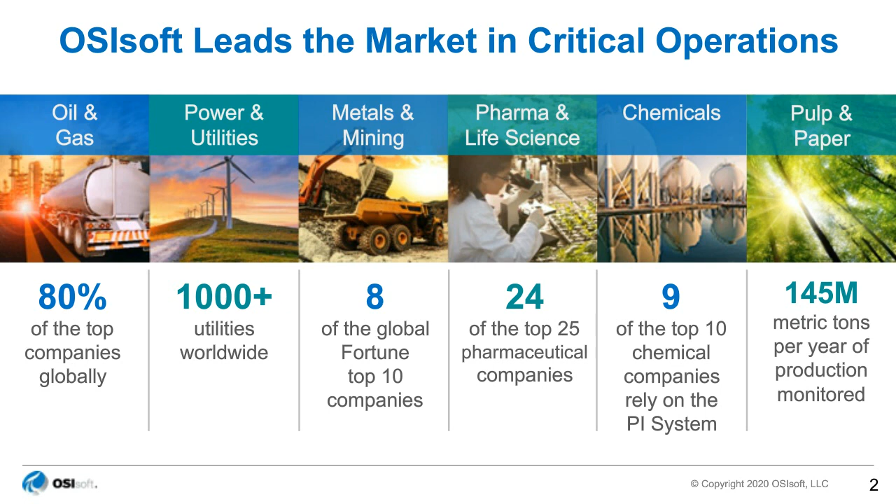Most of these industries have a lot of the common type of things that they do. So condition monitoring and looking at equipment health from a real-time basis as opposed to a post basis or a reactive basis is one of the things that all these customers are doing. Equipment's equipment, and whether you're monitoring from a sensor to a piece of equipment to an entire system, the PI System has been successful across multiple industries.

So how do you do this? How do you systematically turn all this data into consumable and actionable information? Digital transformation needs to drive value and results, and we have many customers that are doing so. And that's why we created the PI System, to be able to have that live situational awareness. So the data has real-time information, it has past information, and it also has future data. This lets you be situationally aware.

Also, our tools are designed for you to be able to mine this information. In the past, it was basically just trends. You had to mine and look at your data and your trends. Well, now the tools are built to consume not only the data, but event frames, contextual data, and calculation and results of analytics and such as well. Then, of course, the system is also built to fill any third-party application needs to give it that critical OT data that it may need to run, similar to our product that Mike will be talking about later.

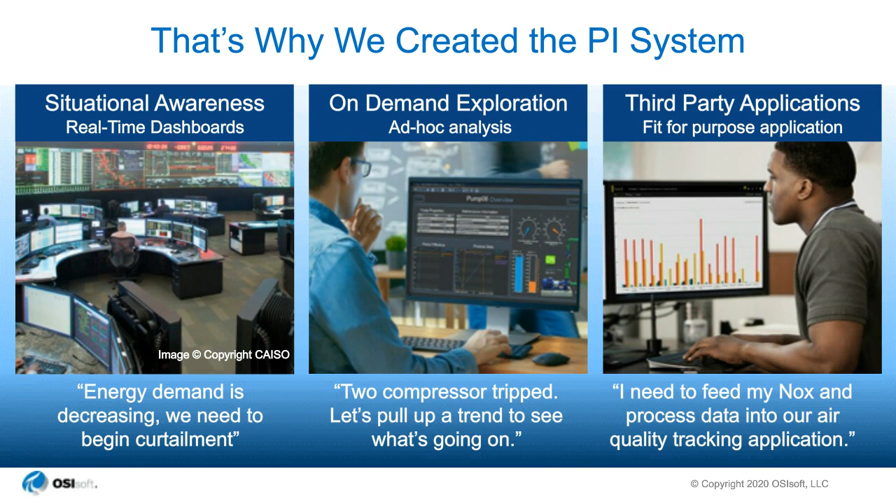To make that information available to more people, really to broaden the breadth of that information. That information used to be locked down inside the control room. And in this instance, we're opening it up. You're going to make a passive copy of all that real-time critical data now everyone can use. So you're really widening the use across your organizations, being able to get that data into your engineers, into your data scientists, so they can use that in their platforms and in their tools as well, to your maintenance engineers, to the people in the field for remote operations.

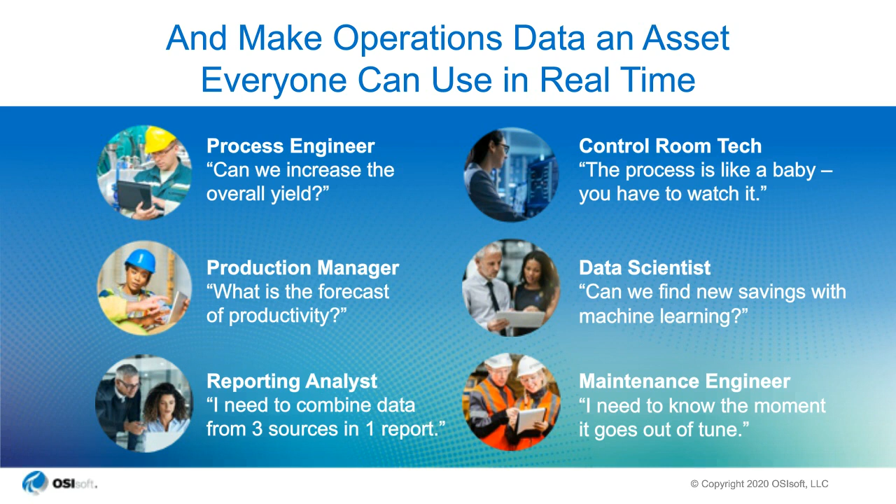During this pandemic, it's been critical to get data and information to people who are remote, people working from home or people going to the site, not with their normal crew, but just by themselves and such. To be able to have access to all of that information has been critical during these times, and our tool set allows that to happen.

So how does the PI System work? Well, we have really pervasive data collection, and within this data collection, there's over 450 standard out-of-the-box ways to collect data. These are high-speed fidelity interfaces that can bring data in at the speed of whatever you're connecting it to.

But we also have interfaces that collect data from websites and do scraping HTML5, or hit a file to pull data from files. So being able to bring all your data together is more than just the real-time data. You want to bring data together that's also your manual data, test data, these other types of things, to get a fulfilled, correlated type of database to give you richer information.

Now that information goes in to be able to be stored and enhanced, and everything in this circle here is one product. It's multiple features, but it all becomes one system, and that's the PI. And so in the data archive you'll store that high fidelity real-time data, the future data and those types of things, and be able to access history. Asset Framework is a way to organize that information and put it in a way that's better consumed by users and by systems, and we talked about that kind of extensively this morning.

And within that Asset Framework, we can perform asset analytics or real-time streaming calculations, also by marking the database on key events. That way you can mine these events in the time frames of when they occur, and be able to systematically pull that information and view it and report on it. Also being able to create notifications that go not only to people, but also to systems like work management and such. And then of course we have to be able to deliver that information, to visualize it, to consume it in PI Vision or in PI DataLink, which is an add-in to Excel.

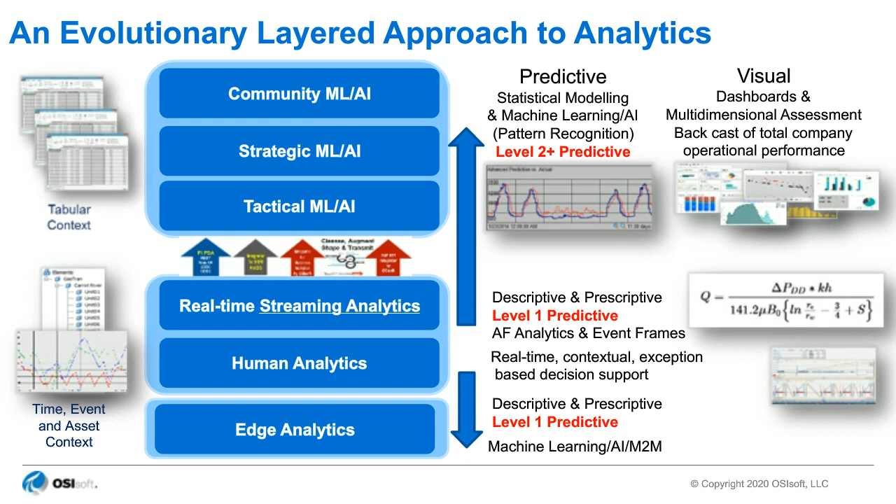Now, the idea of having the IT data lake and the OT structure, we bring those together. We allow you to use IT tools to be able to look at that OT data. When you're talking about the big data lake, the big value add there is when you can take your OT data and correlate it with other supporting data that you may have in other systems, like maybe your transactional systems in your trading platforms and other types of things.

And you really want to see how the fleet performed versus maybe forward positions in power and gas sales and such. Maybe we sold a little bit too much power forward, and we could have kept some back based on the market, right? So being able to do the circular analysis, that's a good use of a big data system, right? Of being able to get multiple points of data together.

But for our purpose of monitoring equipment and such, that sometimes might not be the right tool to apply to analytics, when really what I want to know is, hey, I had a high vibration on that pump. I want a message to come to my phone. I want to be able to look at that data immediately when that happens. Now, that I see happening really in this real-time streaming layer, and also in these top two layers of tactical and strategic, usually done via an advanced pattern recognition program, which we're going to talk about later, or with ties into machine learning libraries and such.

So I hope that kind of clears up analytics and different places that you can place them for high value. I want to talk a little bit about a PF curve. Now, those that aren't in maintenance may not have seen this, but a PF curve basically illustrates that for every piece of equipment or system, there's a P point on the curve, the potential failure point, where some type of degradation has happened. So a piece of equipment or a system is degrading, and this is a point of detection. Then, of course, there's the F point on the curve, which means now that piece of equipment or system has gone to a failure mode.

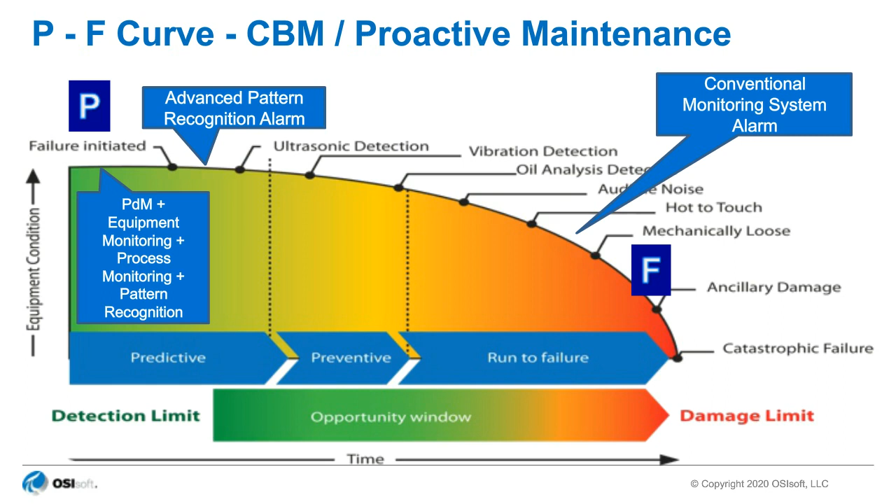You're just waiting till something breaks, and now you're out of the market, you're out of the money, and you're having to plan to repair the device. You may have to go buy replacement power in the power generation industry to put power back on the grid, and then you still have to go fix the equipment.

Now, on the preventive side, you're not really reducing preventive. In fact, you may have to increase preventive in some areas, but what you're really doing is optimizing preventive around a condition-based strategy. So condition-based strategy doesn't mean I'm just moving things from a time-based system, right, to exactly hours of run and operations. It's when I do run a certain amount of hours and a certain amount of start and stop counts, I'm also looking at, well, what's the condition? Is it still good? If it's still good, maybe I get 500 more hours out of it. So what you're doing is you're optimizing your preventive maintenance, and by doing both of those things, the end result is to drive down maintenance that you're doing based on reactive work.

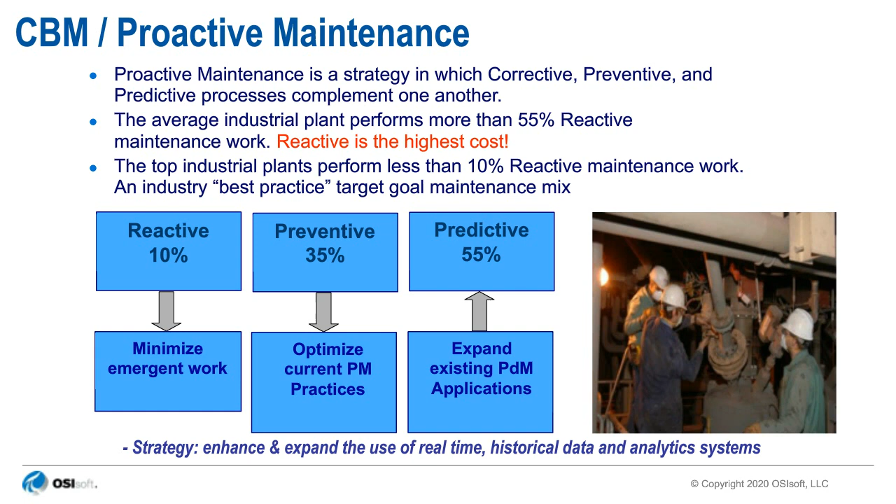An idea around this is in electric motors, we started early detecting of just the winding temperatures going up on the motors themselves. So you change your maintenance practice to clean them quicker and sooner, and that way you never really have any winding temperature damage or any related bearing damage as well. So you want to optimize your work order type of system. You can actually code work order systems to have these in there and track the improvement of plants over time as they adopt the technology and deploy a digital strategy.

You're talking about the PI system. Simple kind of decomposition is that you're really going to gather the information in the PI system. You're going to collect it with those interfaces and ways to bring in data and information, all your real-time data, and correlate all that information together. Then you're going to transform some of that information into these calculations where you're getting efficiencies and design versus actuals, and rate of change, and these types of things. And you do that in the real-time data stream.

And then, of course, we can do more CBM type level things. We're talking about volumes and time and service and such. And then, of course, being able to consume these either by registering and running some KPIs within the calculations, doing reporting against these things, or feeding it into other applications. All that functionality can be done right there within the PI system.

And then, of course, to tie that PI system into a work management system like Maximo, SAP, Meridium, or also tying in for another level, for that level 2 analytic, an application which is a bolt-on, like advanced pattern recognition or machine learning type of application that allows you to get even more insight to these assets. So that's basically what that would look like under a construct under PI of what CBM would look like.

So let's talk about asset framework. Asset framework is a way to be able to structure your information and then consolidate more data into it. So basically, it's an object model and an abstraction layer. And the abstraction layer is both for users, ease of use, and then also an ease of use to getting data into other applications as well.

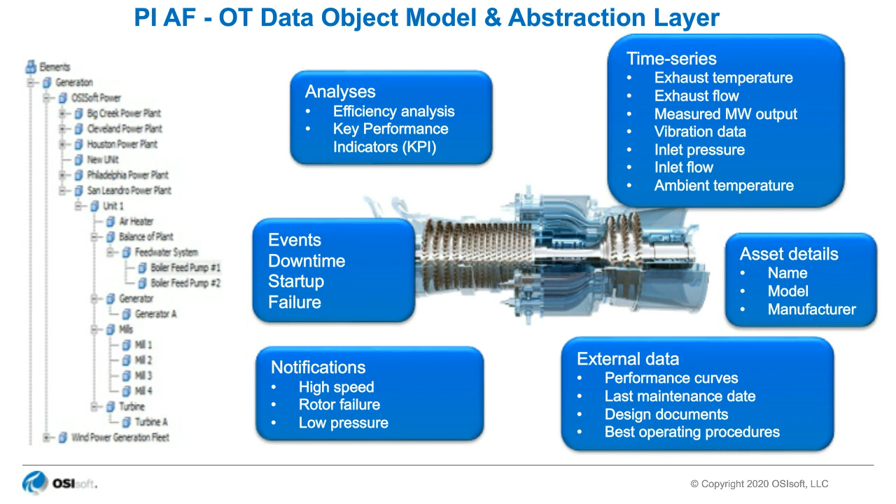We can calculate these efficiencies and performance indicators and doing downtime, startup failures. We can do all these types of events that'll show the startup of a gas turbine and the shutdown of a gas turbine, or the variations within what's going on in other types of generation assets. We can turn those into notifications as well, and reference performance curves and limits and things. And anything you get in the abstraction layer and in that model, then you can do mathematics on those. Now, let's talk about what that means. It means that we're connecting to all of our raw real-time data.

We're going to put that into a structure that makes sense and is consumable to the users and puts the data and information in areas that make sense, like all the data around a pump, all the data around a generator, and we can consolidate that information so it's easier to use and find and easier to do that mathematics. Also being able to reference those other things that you do.

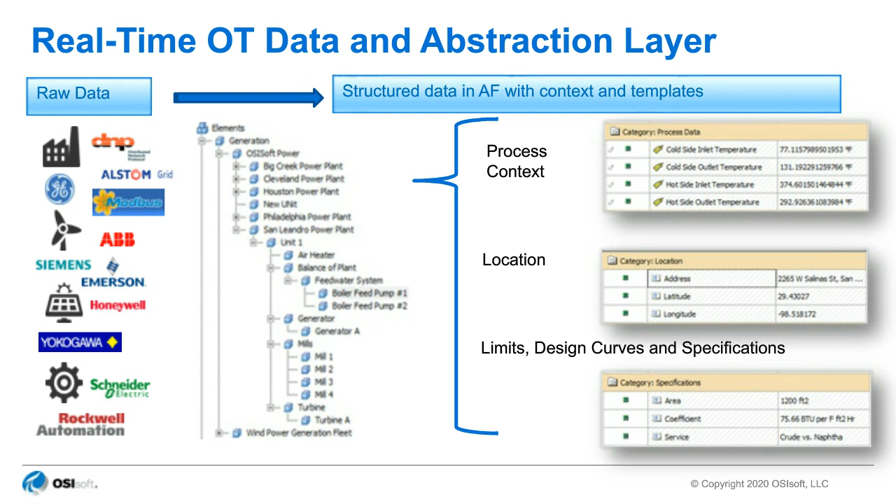Now, once you have all your raw data in a structured data, now what we can do is use those event frames and analytics and change and create new information, transform that data into more consumable stuff. Like, hey, I'm taking like an amperage or a flow and I'm turning that into, I know that pump is on or off. So I have a start and stop counts. How many times does it run? How long has it been running? I can have this systematically be recording into the database. And then all I need to do then from a reporting perspective is mine that information. I can move the data screens around per those timeframes and such as well to do ad hoc analysis.

I can do things like rate of change calculations. So if I have a generator that only heats up at a certain amount from start to on, but I start seeing it heating up at a faster rate, I can have that send a notification to me. Doesn't mean it's hot yet. It just means it's getting hotter faster than it normally does. I can compare actual versus designs.

There's all these things that we can do in that layer right there in the real-time data stream itself, and be able to do these calculations, and of course, be able to get notifications on those, bring that to the users who need it, or also bring that information out to another system. So now I have my structured data. I still have access to all the raw data as well. I don't lose any of that, and I have these transform results. That's where I'm going to get most of my bang for the buck there.

But then I can also tie this into other systems, right? I can send that data into an APR or into hooks with R and MATLAB and Python and such, or get it into big data systems via our integrators and be consumed in other ways as well. So we do this in AF through smart objects, what we call templates. So these templates you can create per like equipment or per system if you want.

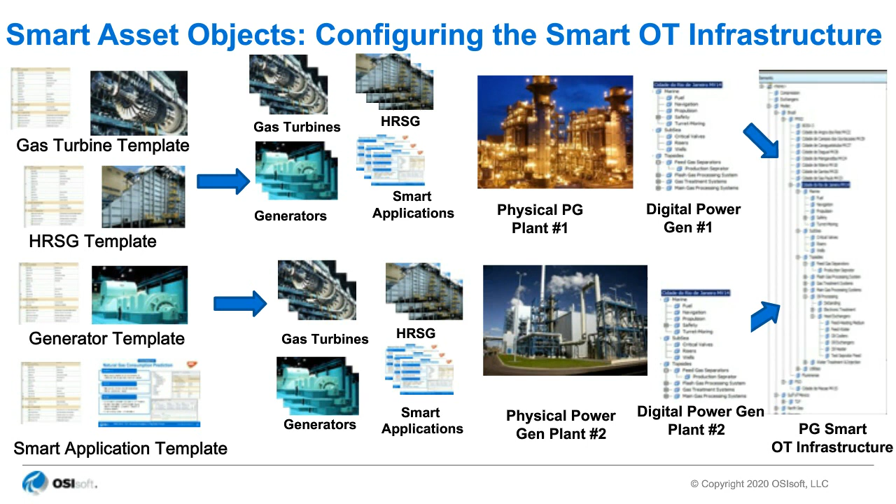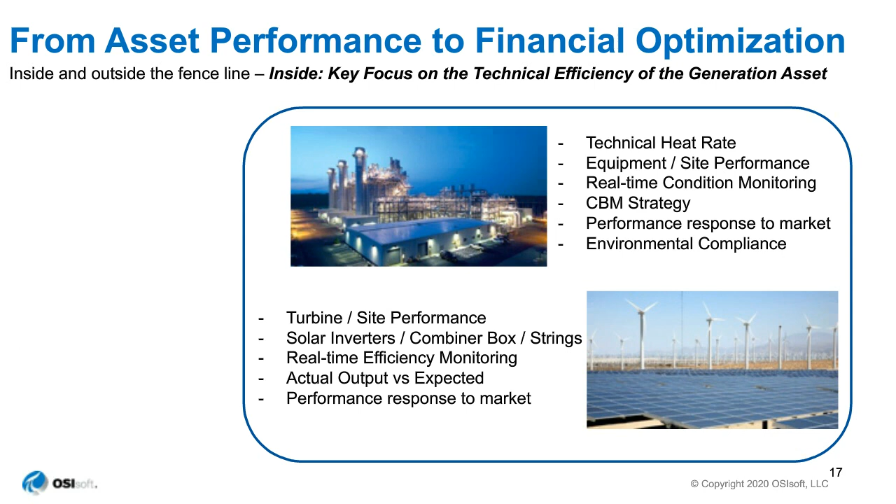Now, when we're talking about this data, we're always looking at a focus internally, right? So we're looking at, are we monitoring the heat rate and equipment site performance? We should always be focused that inside the asset, it's technically working as well as it should. And this could be your solar inverters, your combiner boxes, measuring all the way down to panels and strings, really looking at the assets from the inside. And then you can do all that by that modern technology. So you have the raw data, but then you also are going to groom that information, create that new data for them, and enhance that information to make better decisions.

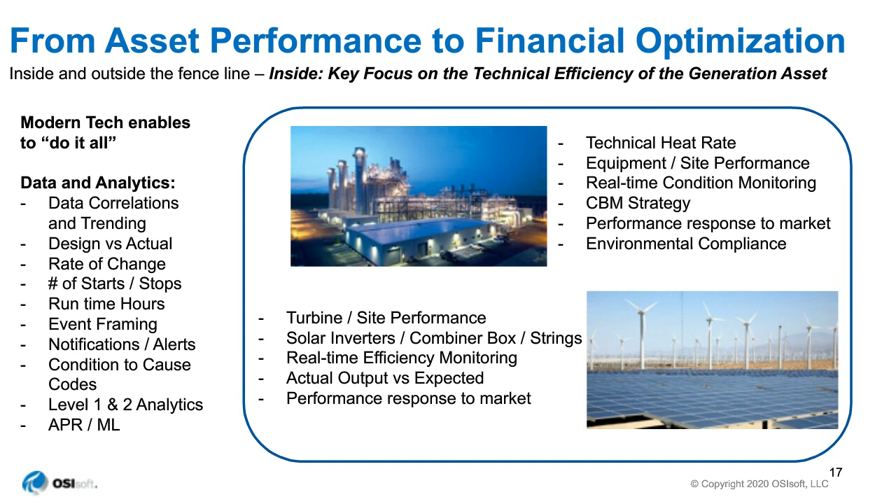Now, one thing else that kind of drives your maintenance strategy is, of course, your financials. So not only do we need that focus internally to all of our assets, we need to step back and say, you know what, there's other data, there's other information that we need to put around this. And this would be like around, what does it cost? What's my fuel?

What's my permits, my consumables, my maintenance, my contracts I may have? What are these things that are the cost of that facility? And then at the same time, what are the things that I have for revenue on that facility? Maybe it's in the market live and I'm getting real-time megawatt hour payments out of a market, or maybe I have a PPA contract. I just need to measure my performance versus the terms of my contract.

We have customers that are doing that with AF, where they're actually measuring how they're doing against their PPA rules and displaying those in near real time on their dashboards and being able to see exactly where they are in compliance to that. Same way with regulatory as well, making sure they're 100% compliant with regulatory issues, whether they be environmental or operational.

Being able to look at and calculate the value of some of these ancillary type services when you're doing things like voltage support or automatic generation control and those types of things. You need to get your hands on those so you really can understand how that can help drive what maintenance you should be doing and on what assets.

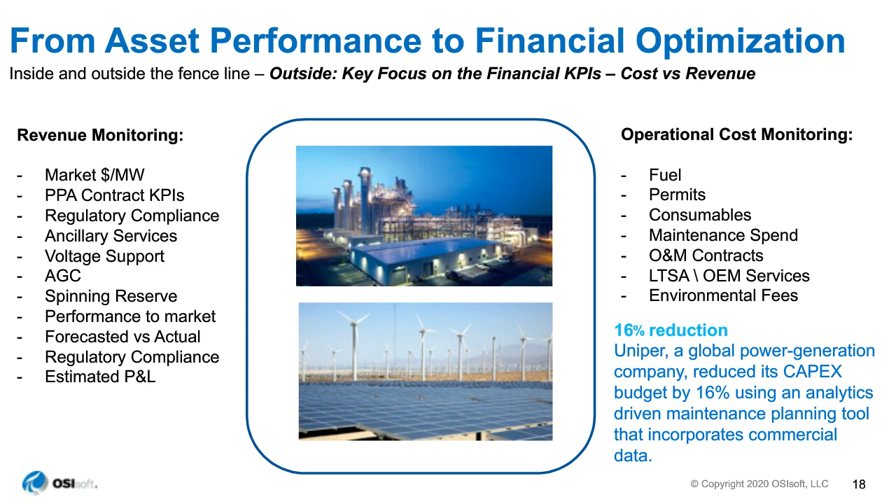Uniper is one of our big customers over in Europe, and they were able to combine all this information to be able to look at things in ways that, by using analytics driven by their maintenance planning tool that incorporated their commercial data, they were able to reduce their CapEx spending by 16%.

A quick example of monitoring performance using PI event frames. This is from EDF, monitoring site. Just an example of a pump. So they had this pump in operation since 2011. They wanted to see what the maximum vibration was over all that time.

Now, having PI, our calculations and event frames can be back calculated. So as you create one now, you can say, you know what, I've had PI running for a couple of years. Let's go back in time and build that same event frame or build that same calculation.

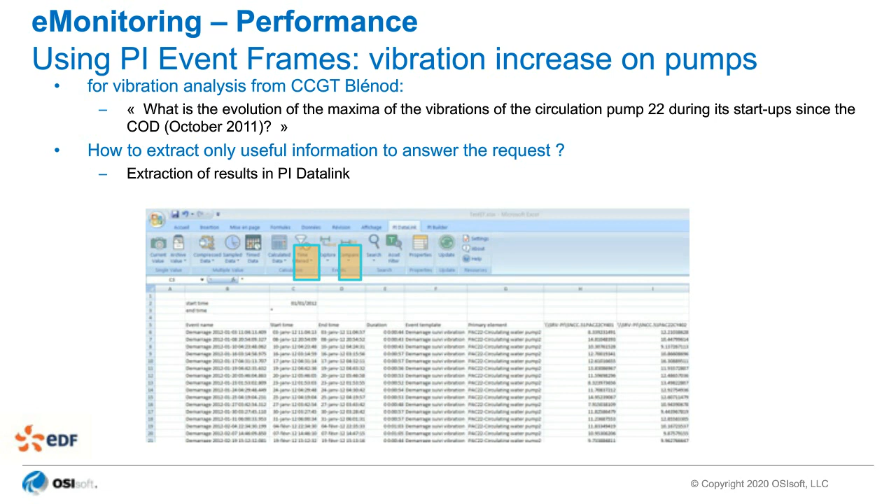And here's what they did on this pump study. So they're able to go out there, build the event frames, back calculate those, and do a pump study in less than two hours. Now you think about trying to do that in the past, this would have taken a long time to do. These guys were able to do it in minimal time.

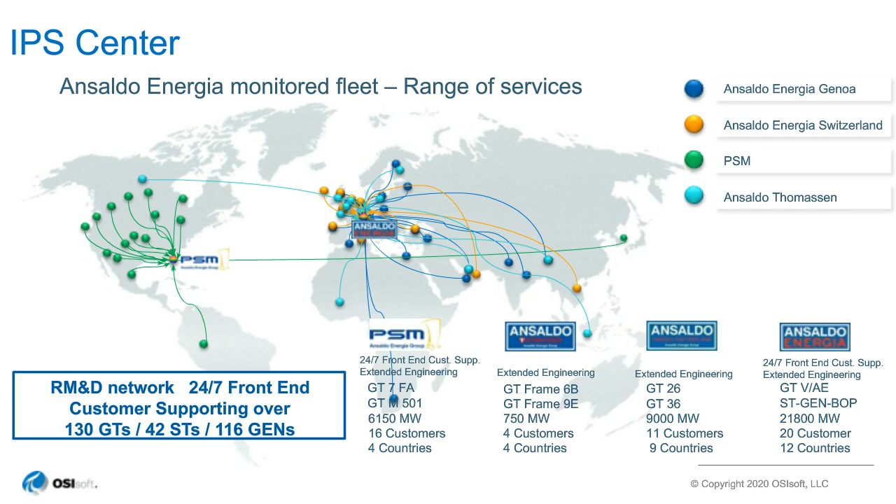And Ansaldo Energia monitors a diverse fleet of assets. They're out of Italy, and they also have a center in Florida as well. And they monitor gas turbines and HRSGs, and they monitor plants from all over the place. They have taken this to heart. They use AF for their asset modeling. They use notifications to get information out to the right folks. And they're also using event frames for their asset analytics as well.

And they're using PI Vision, which is our visualization tool, which is based on HTML5, and they use some extensibility features of it as well. Just some examples of some high-level screens. This is a one-glance look at a bunch of gas turbines. Of course, there's some calculations behind the scenes to determine what their condition is at this point.

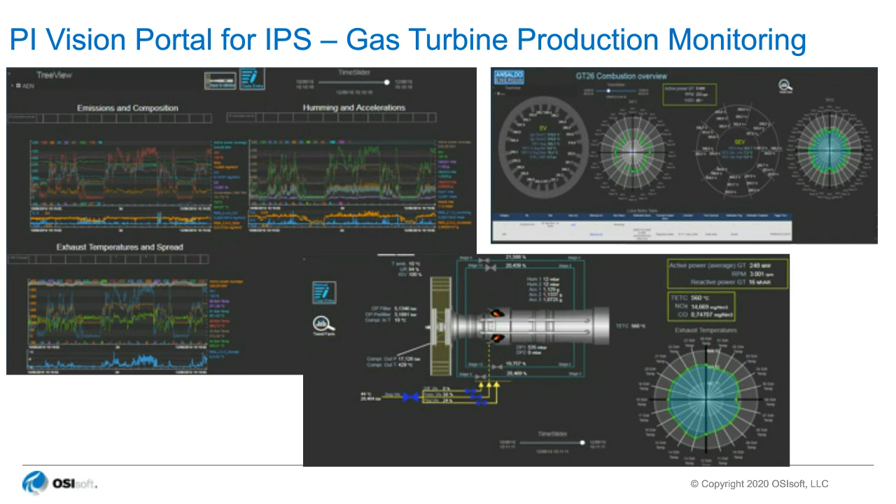But they can drill down into these various processes, looking into the gas turbine production itself, its exhaust temperature spreads, those types of things in detail, being able to look down into their generators and study those, being able to look at their steam turbines and such, all with the same system, all with the same visualization tools that work on your phone all the way to your desktop.

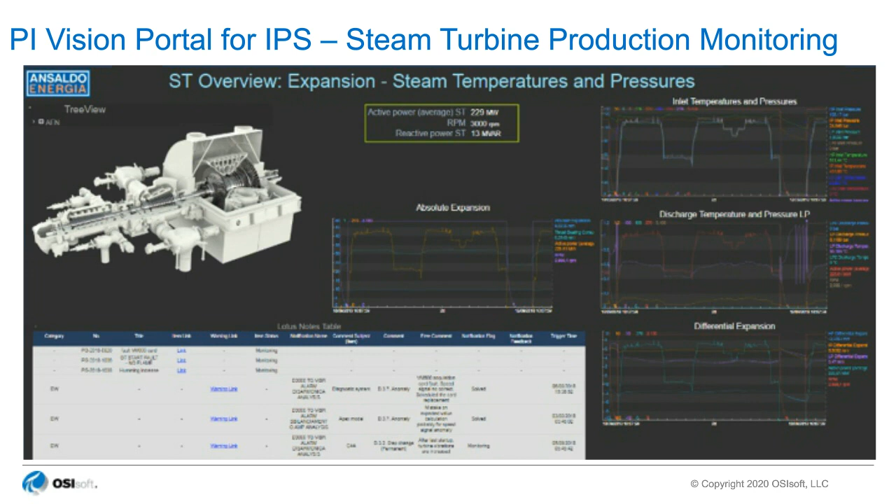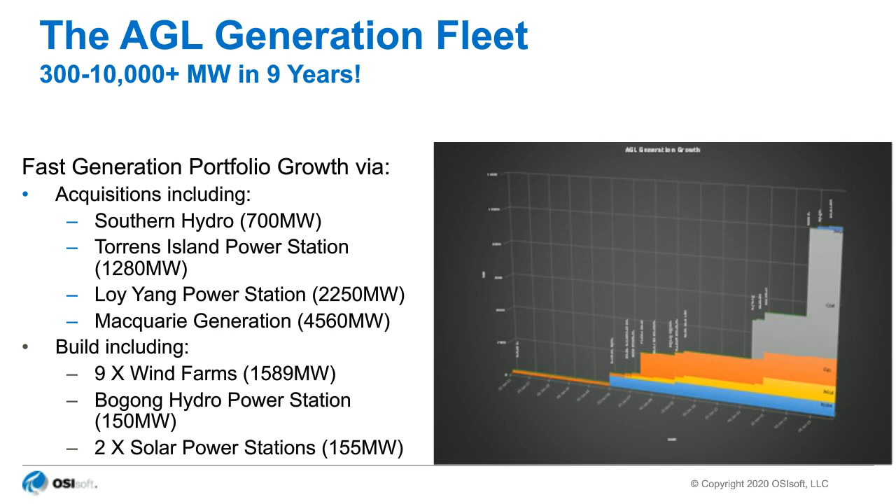Now, this story here I like to hype on because this is done. This is Australian Gas and Light down out of Melbourne, Australia, and they really were aggressive and quite a success at doing a digital transformation. They began really growing their fleet quickly, and around 4 or 5 years ago, went into a digitalization move with OSIsoft. Basically, their footprint of IT is quite small to do the accomplishments that they've done.

They're using core PI products. PI is at the center of their operation technology center, and they're using these features of AF, and they're using PI Vision and ProcessBook and Manual Logger to collect all your manual data in rounds and such. And they're using APR ECG's Predict It, which Mike's going to talk about right after I speak here.

And so, as you see, their footprint is quite small from an IT landscape perspective. They really drive events down into a logbook, also a partner product called RiTech Software. It's RT Duet.

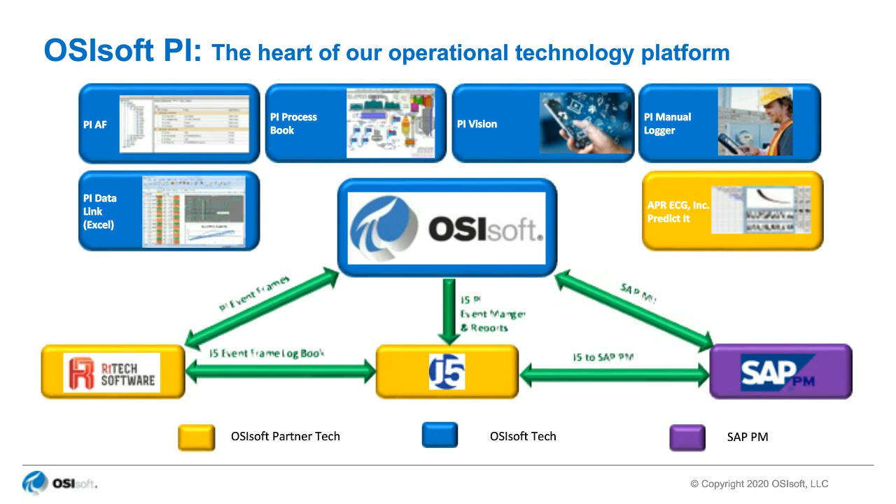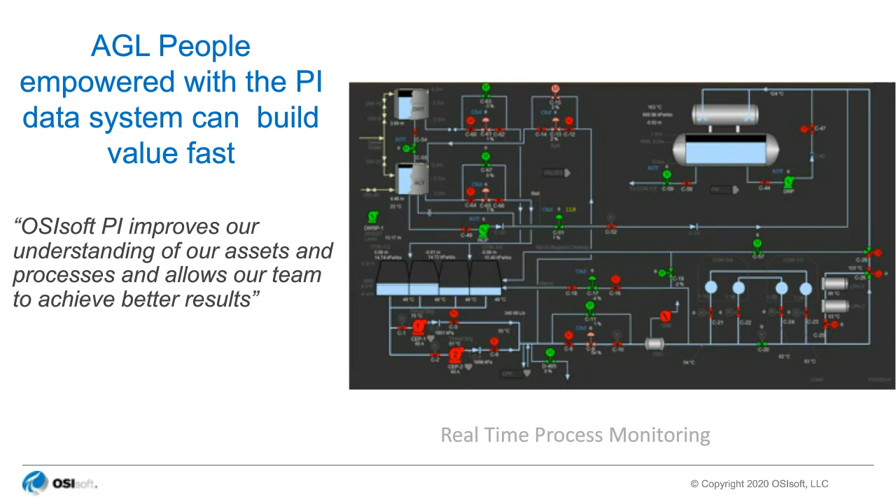They're doing some event frame analysis there, but then they can also drive work orders and information back into their SAP system from either J5 or directly from the PI system. I'd like to show some of these things that they were able to accomplish in a minimal amount of years. So they're monitoring the condition and the health of solar facilities. They're monitoring the real-time process of their water systems and such.

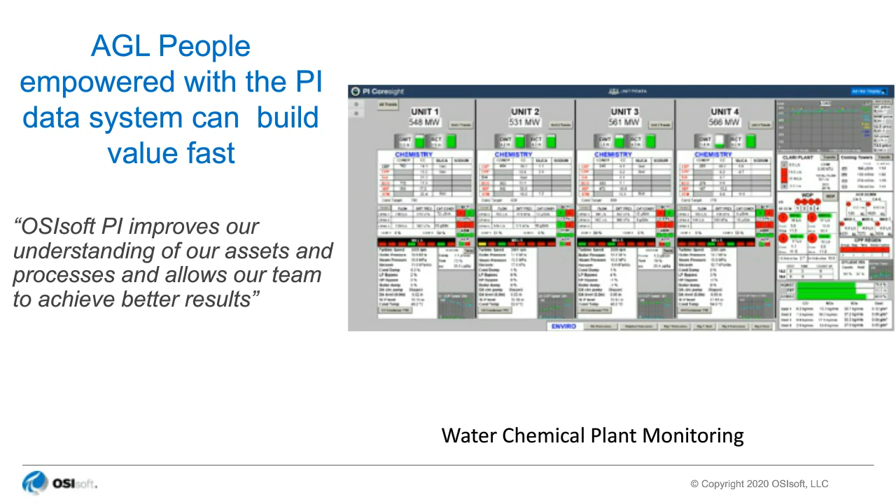They're monitoring their chemistry. One of their chemists took the training, took to it, came up with this beautiful screen. They've now applied this to multiple sites, and people can access this on their handhelds as well. They're looking at their generator monitoring. They have some remote hydros that are very far away, like over 700 kilometers away. One of their craftsmen had put together a really nice set of tools to monitor the trips. So when they have a trip at one of these units, they know what to dispatch out.

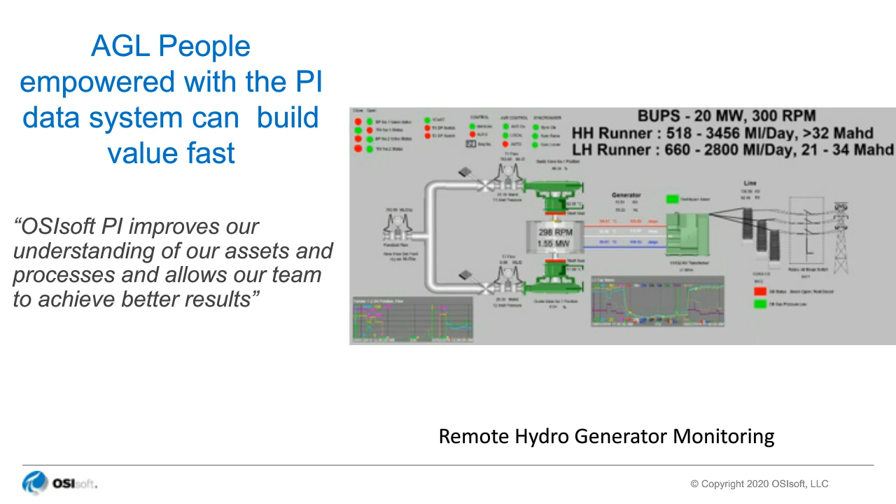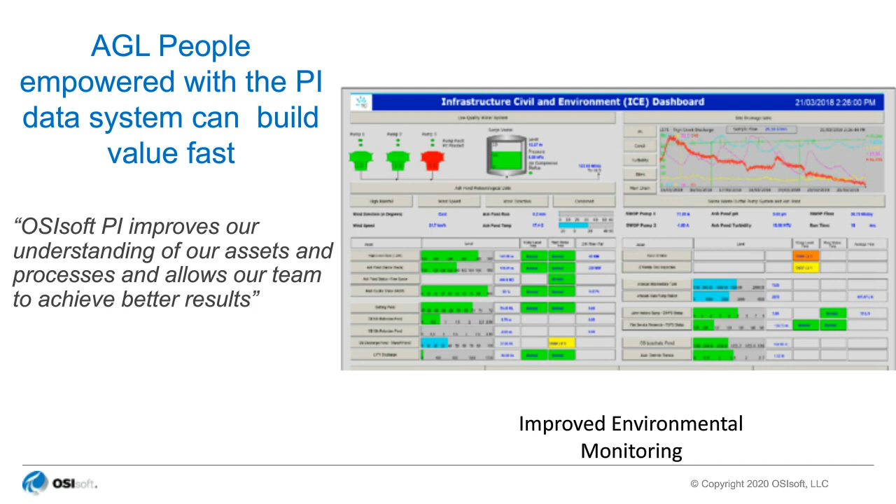Various things like generator capability monitoring, feed pump performance, total fleet capacity, environmental monitoring, and of course collecting data up on a mountain on a snowmobile is basically future data they could put into the system, because this is future water reserves, basically a fuel for the hydros that's going to come down into the reservoirs, so they can measure the depth and the density and put that into their calculations for what they have capability of on their hydro units.

Now, this case here I want to talk about is a very significant catch that they made. It was on a 560 megawatt hydrogen cooled stator. Basically, this unit had a little temperature drift. The PI system with pattern recognition noticed that drift. They decided that we need to start looking at this thing closer. So they started watching it. Sure enough, later on, it spiked up a little bit more. It's still not a temperature that would set off a lot of alarms or anything, so everything looks good, but it's higher than it should be.

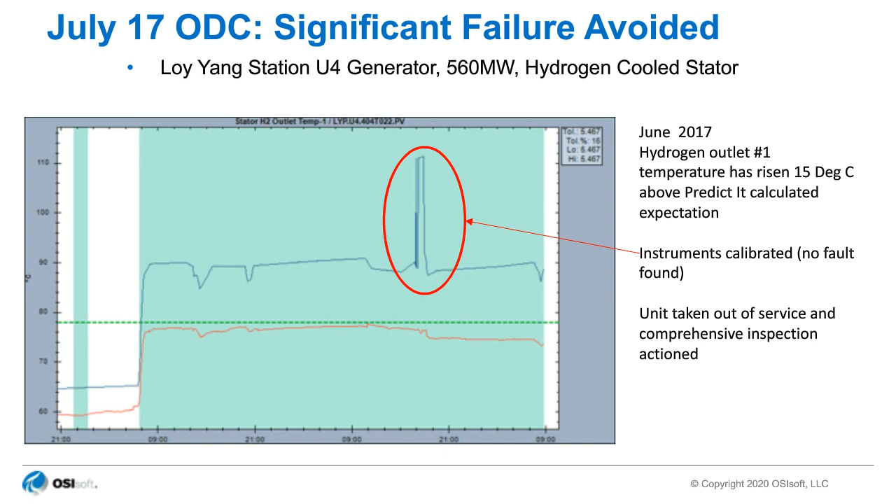And the central engineering group, working in cooperation and partnership with the local plant site, decided to do a detailed inspection and really look at this unit. And sure enough, it was very near catastrophic damage and thermal runaway. If it would have gotten worse, this thing would have been a 12 to 14 week outage. It actually only took them about 4.5 weeks to fix this part of the generator, and it avoided possibly $50 to $70 million in losses by being able to do that.

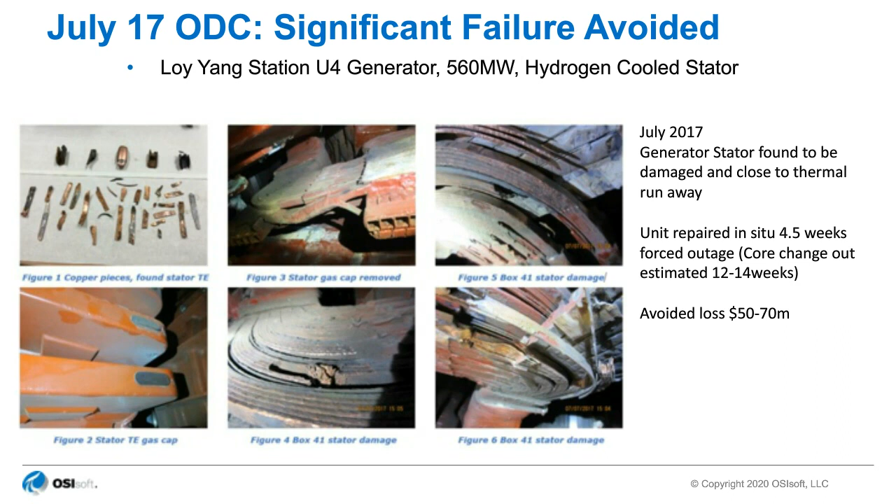So just over the past 3 years, AGL's had some great results. Over 18.7 million in avoided losses in three years, 8.5 million from the financial savings last year. Now this was from 2018, and those savings don't include this one big one of the 50 to 70 million on that generator.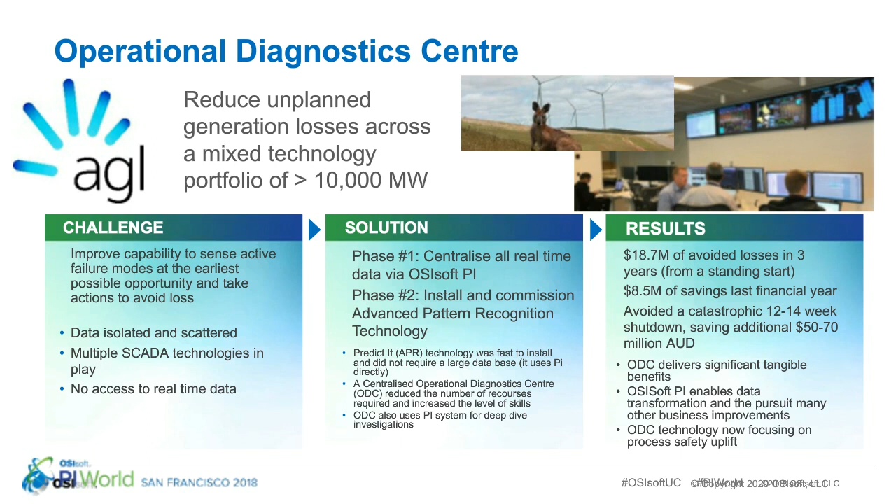I'm going to talk in specifics about our product Predict It. This is an APR product that bolts onto the OSIsoft PI system. I'm a mechanical engineer, 35 years in the power industry, and been doing things like controls and monitoring systems pretty much all my career. This product that we'll talk about here is another big data analytics type of program, and there's certainly a lot of hype, as Dave had mentioned in his presentation, around putting analytics to this data that we're collecting.

Some of the stats that I have here: 92% of Fortune 1000 companies are increasing their investments in big data and analytics. And the market's projected to double in the next 7 years. So a lot of momentum here around these technologies. But one caveat here is that statistical reports say 50% of predictive analytic projects are reporting very little or no return from the investment. And so the focus is on how do you get your investment to pay off, where's the low-hanging fruit, where should we focus most of our attention? And that'll be the theme of this software.

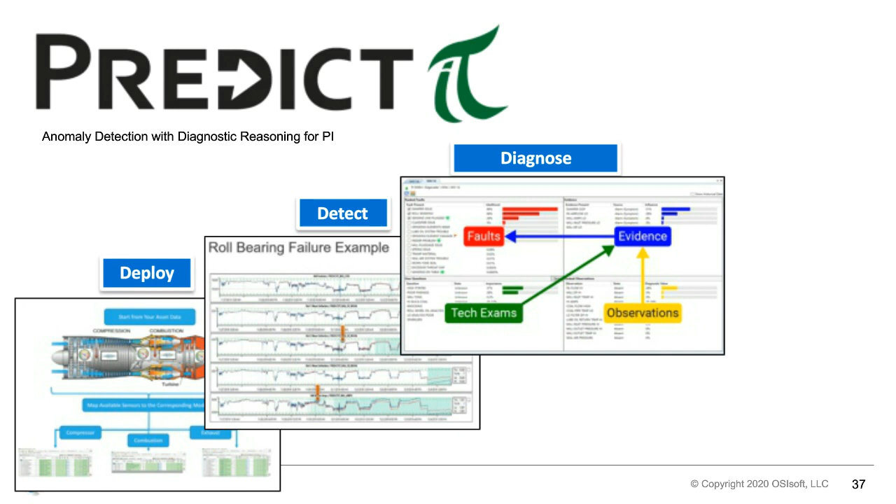And then finally, the take action, and Dave spoke to this, that all this is for naught unless there's a way to close the loop on the identification of an anomaly and communication to the plant for action.

So we'll start with the advanced pattern recognition and kind of build up to where we want to go with the diagnostics. So in our APR, and most all APRs are like this, there's a subject matter expert that's kind of needed to put a context around what information belongs together. So in my example here, I have a fan that I'm trying to build a model around.

And of course, these fans move from a low load to a high load, and as they move, the temperatures, pressures, flows, damper positions, the amps, they all kind of move up and down along with the asset. And what you're trying to do with the APR system is capture that information, the information that one sensor contains about the behavior of the second. So in the first part of the build out of the APR, you're doing a tag mapping, you're trying to figure out what data belongs together.

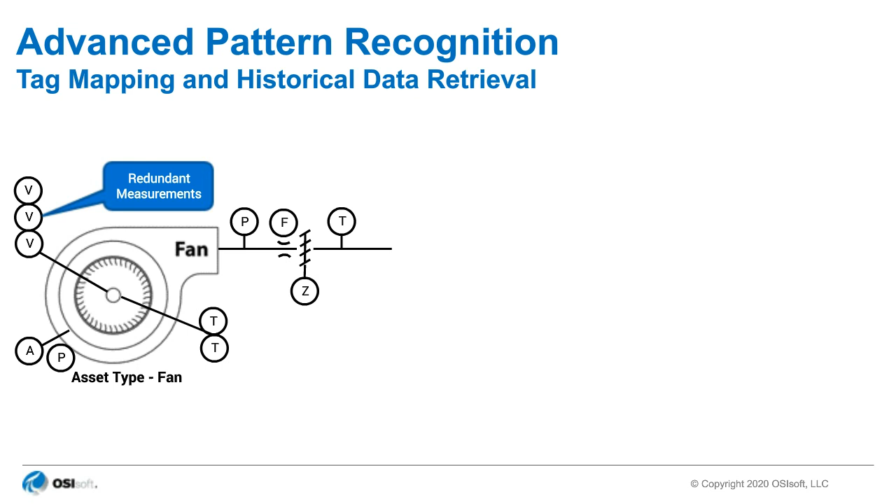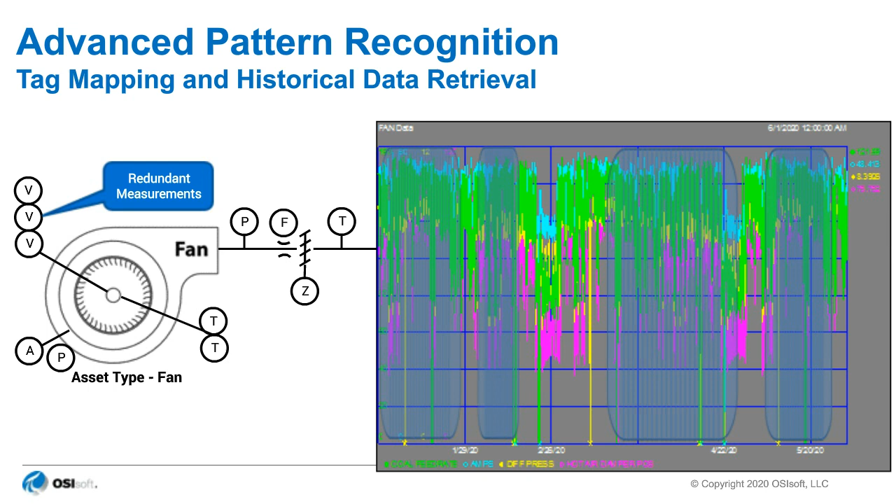The next step of the advanced pattern recognition is what data do I use to train the model? And so the PI system is rich in historical data, so I have a lot of information that I can use. And again, a subject matter expert is useful in picking out what are the training periods that are free of anomalies and free of sensor issues and so forth. And so we have a mechanism to grab data from the PI system, from the archive, and those time series slices of data become the basis for what we will consider to build a model.

And so with that information then you need to massage the data. So there'll be sensors that have no values that you need to do imputation on, and other sensors that are out of range or that you want to exclude. So this filtering mechanism or outlier removal method is a very big part of building the models. If you build good models with steady state information, they'll be very repeatable. So in this process of building out the models, we spend a lot of time and analytics on coming up with the right data to use to define the normal operating behavior.

Once we have this normal operating behavior for each of the models, then we can use the information that we retain and the relationships between the variables to generate expected values. So in this example, if I want to calculate the flow in the upper right, I'll use the pressure sensor and the temperature sensor and the amp sensor in this case to determine where the expected value is. And the expected value becomes some sort of an average of the other points that are in the model, those with higher correlation having more weight on generating the expected value for the target variable.

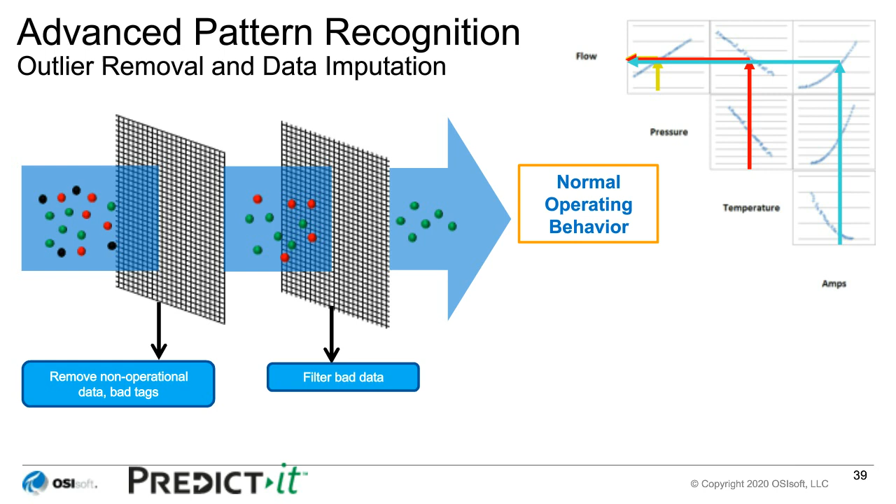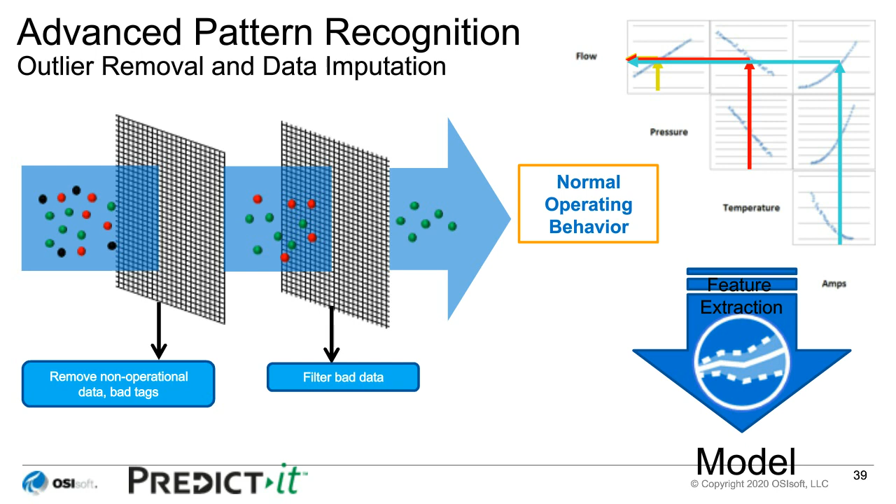So this feature extraction, grabbing all this data and trying to figure out how the asset behaves for every different load, is the basis of the APR. And so we're generating an expected value for every point that's in a model and then trying to use that to figure out when things change. So by building out the models, we generate a tolerance by which we can calculate the expected value. If we have very good, tight correlation between sensors, the tolerance band is very small.

If the correlation is not so good, we can't figure out what the sensor is doing, the tolerance bands get larger and larger. So those are things that get calculated automatically right out of the box with the software. But once these tolerances are built, then we can apply these to the sensors and then be able to determine when a sensor is outside of its normal operating range. And at that point, that's the trigger for an alarm in our system.

And the thought here is that you have these alarms that can come in when there's a slight deviation in the process. We're talking maybe 3, 4, 5% over the range of the normal operation of the sensor, being able to detect that kind of a deviation. And again, the early warning that you get as a result of doing this is the value proposition of the software. Being able to determine this months ahead or weeks ahead so that you can plan it rather than react to it is where the value is at.

So what we do then with the anomaly is we want to move up the chain. We want to know, okay, what is this anomaly? What is the alarm associated with? And so we take the anomaly and it would map into multiple models for different fans in this case. But this asset variable called bearing inboard temperature, we want to look at its behavior to figure out what it's telling us a likely fault might be.

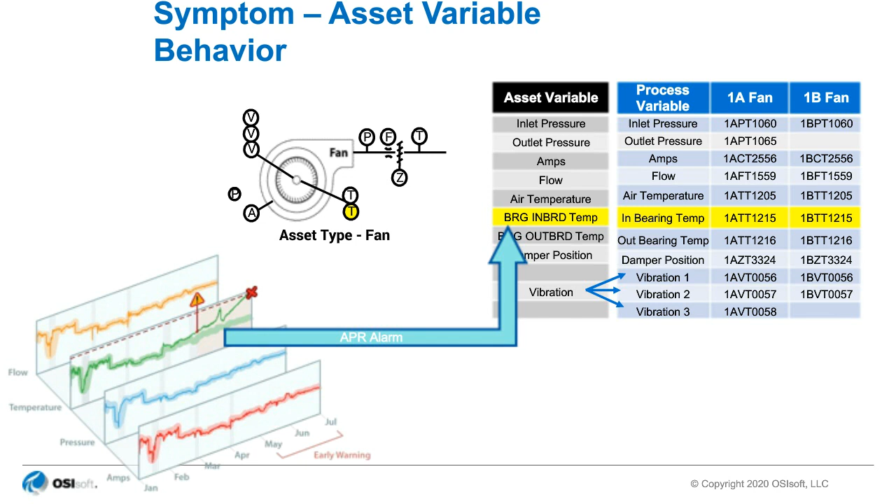So if we look at this inboard temperature and we look at its behavior and it's deviating high, we want to be able to map this to the common problems that this asset type might display. So in this case, inboard bearing temperature deviating high would be associated with a bearing issue. So this is a simplified example, but this is basically how this diagnostic piece works.

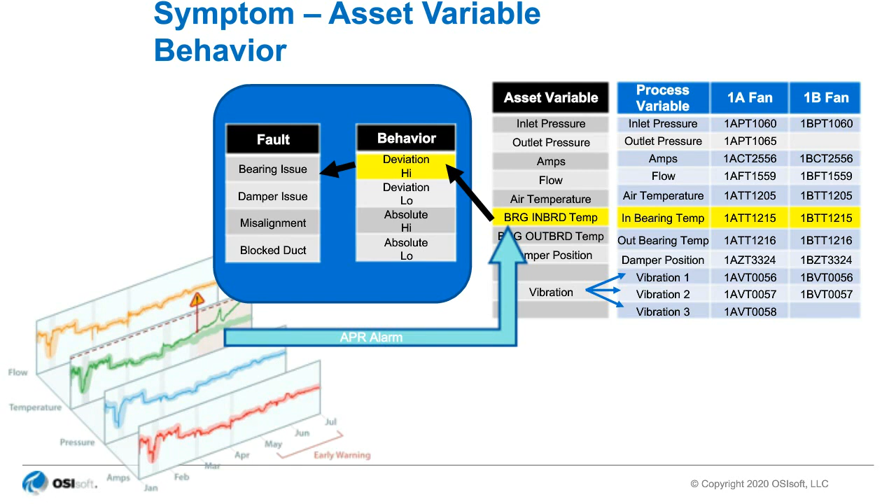And again, we bring the subject matter expert back in to do what we call the knowledge elicitation. How do we figure out what problems an asset type has, and how frequently do we have that kind of a problem? And for this we may employ multiple SMEs: one that's a fan guy, one that's a pump guy, one that's a turbine guy. But we compile these lists of typical types of failures or faults, and there may be anywhere from 10 on a simple asset to 50, 60 on a steam turbine or a gas turbine.

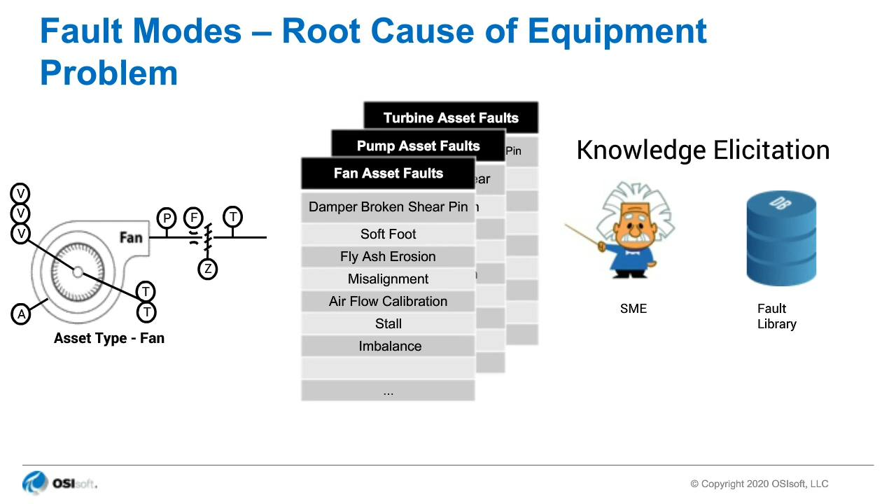And this information can come from the knowledge of a single person or multiple people, and combined with a fault library. So if you have a database of, hey, the fan failed, we had this failure and we saw this symptom and that symptom, we can ingest that kind of information to build a diagnostic network. So this diagnostic network is basically a mapping between faults and symptoms.

Okay, so if I list out all of my faults here in the top part of this display under faults, and all my symptoms at the lower part, I can see that when I have a problem with a damper shear pin, for example, on this fan, I'm going to see the symptoms of an airflow deviation, discharge pressure deviation, and probably a damper position deviation. And they may have more weight.

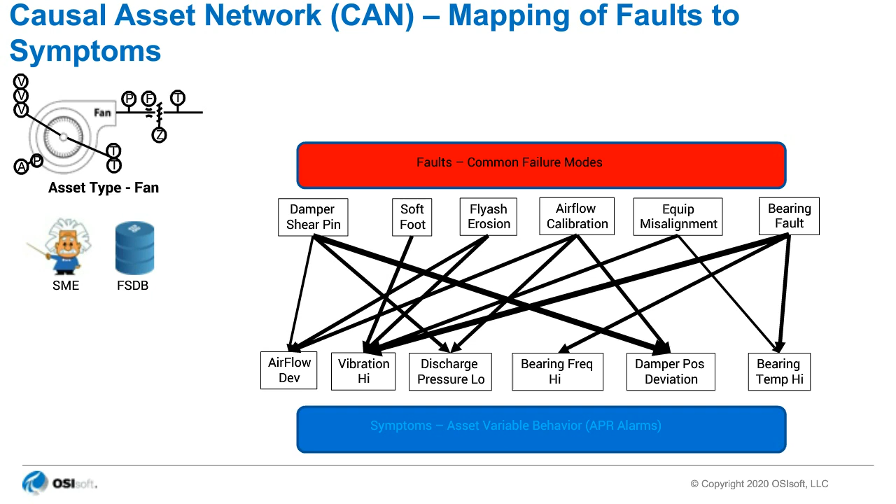So this probability of seeing a symptom given the fault is something that the subject matter expert sets up. And he sets this up one time for the asset, and then this network can be applied to any asset that falls under this asset type. So this configuration of faults to symptoms, once we do this for the rest of the faults there, we form a network, and we call this network a causal asset network.

And we would have a causal asset network for a fan and a pump and a steam turbine and so forth. And this configuration of this asset, with all the knowledge of the subject matter expert, combined with a database of faults, basically becomes our fault signature database, or a network that allows us to reason.

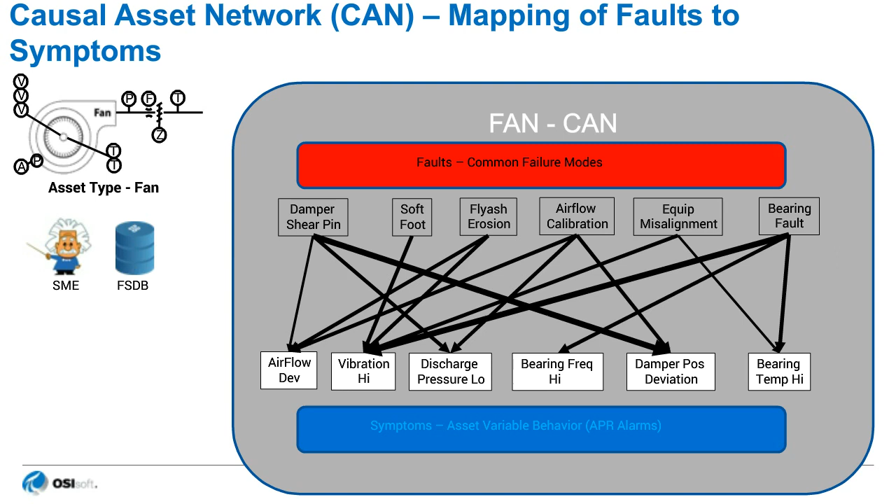There's also the need to ingest additional information from what we call tech exams. This would be like a fineness test, acoustic test, oil analysis, and so on. So the results from these tests are also very helpful in distinguishing between common faults. And we basically want to ingest both the APR-derived symptoms along with the tech exam symptoms.

When those alarms come into play, they move up into evidence. And with this evidence, we calculate the likelihood of each fault being present. So in this model, we're using something that's not conventional, like a fishbone diagram where you go down and you get to a root cause.

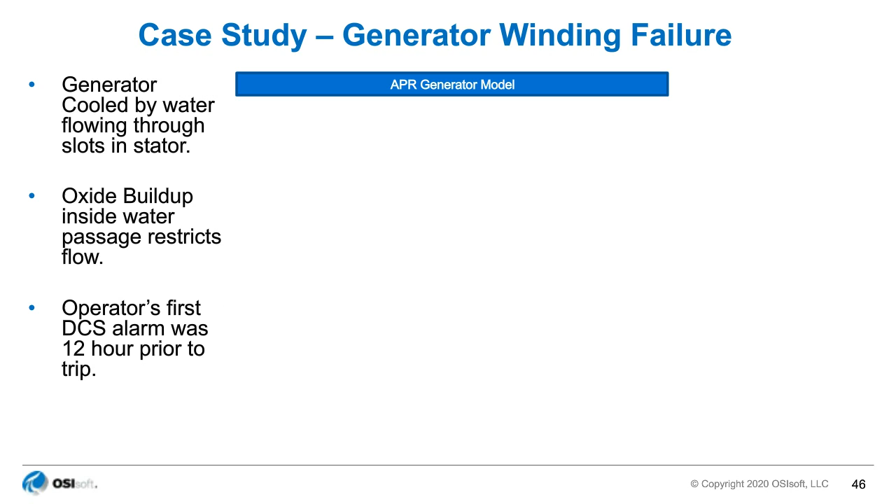So a couple examples of what we've just described here. Dave spoke about the AGL generator, and this is a generator at another utility. I happen to have two generator examples in our presentation here. So this is a water-cooled generator. The stators are water-cooled, and in this example, we have an oxide buildup inside one of the passages

that built up over time. The operator's first acknowledgement that there was any kind of issue at all was an alarm 12 hours prior to the trip. So we took this information as a post-mortem to try to see what APR would have been able to show. When we ran this data, we included 3 years of data. We included the first year as our training data and then tried to predict what would happen over the course of the next 2 years.

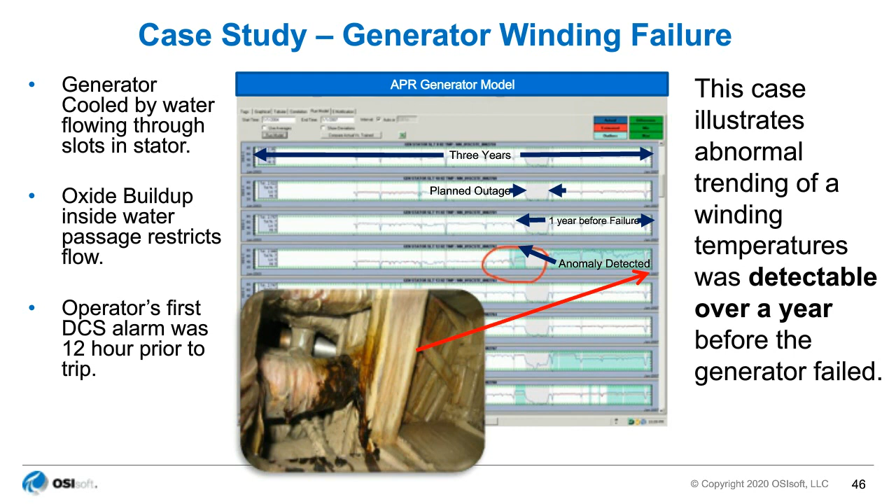And we were able to detect an anomaly here. You can see where our two lines start pulling apart, the green shaded area representing the anomaly determined. The end result here is that they had a planned outage in this window, so once you see this anomaly, if we would have reacted to it, we could have done an acid flush or whatever and possibly removed the buildup, but we didn't, and we ran for another year before the insulation broke down and the generator tripped to ground. So this was very costly, as you can imagine. This is a 900 megawatt unit that came down unexpectedly.

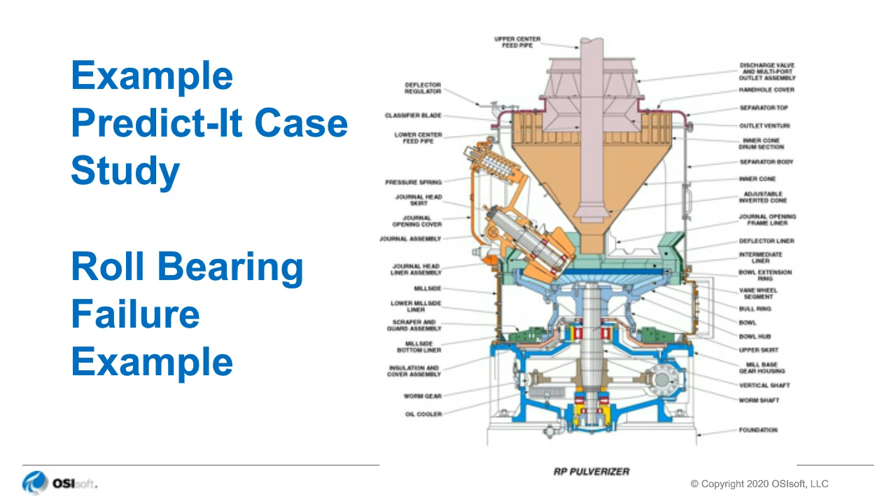In this second example, I'm going to try to describe how the APR and the diagnostic reasoner work together. In this example, we're going to talk about a coal pulverizer. This is a nasty machine that grinds coal between the table and the rolls. In this case study, the seal on one of these rolls gave way and allowed ash and coal to get down into the rolls, worked on the bearings over time, and eventually seized the roll up. So what we saw in the APR software was this roll bearing failure.

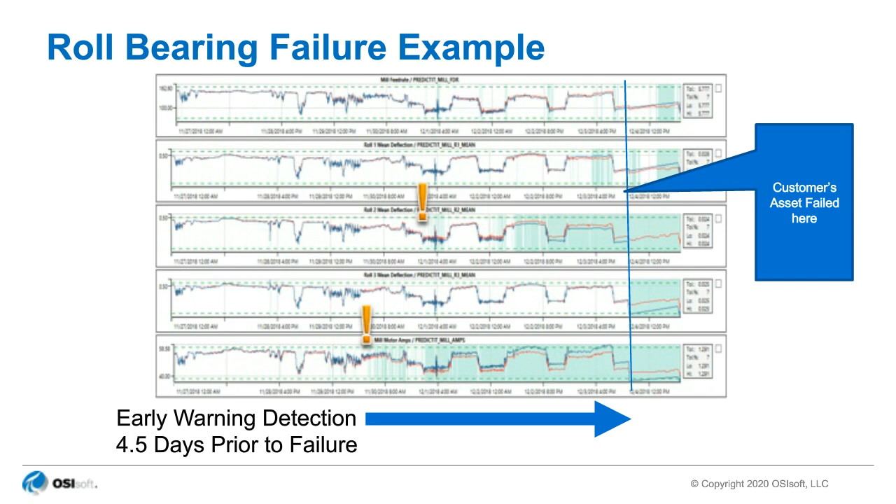The diagnostic reasoner is trying to figure out what's going on. The very first piece of information that we get is this deviation in the mill amps. With this one piece of evidence, it's sorting through all the possible faults and ranking them based on likelihood. In this case, we're guessing that it's a broken spring, but we have low likelihood, low probability that this is actually the problem.

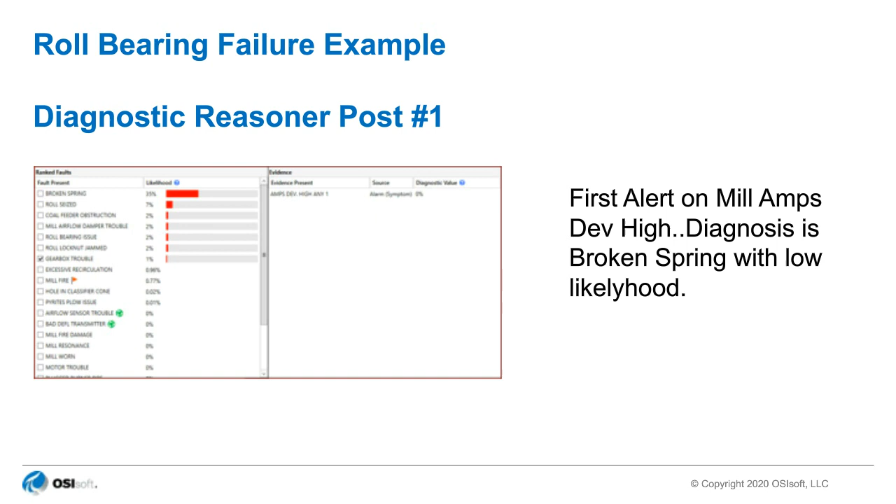But we're focused in on the top 3 issues as being the likely problems, and we can use this information to figure out which of our test exams are the most valuable to run to help us solve these problems. So the next piece of evidence comes in, the roll deflection. Now we're recalculating the network.

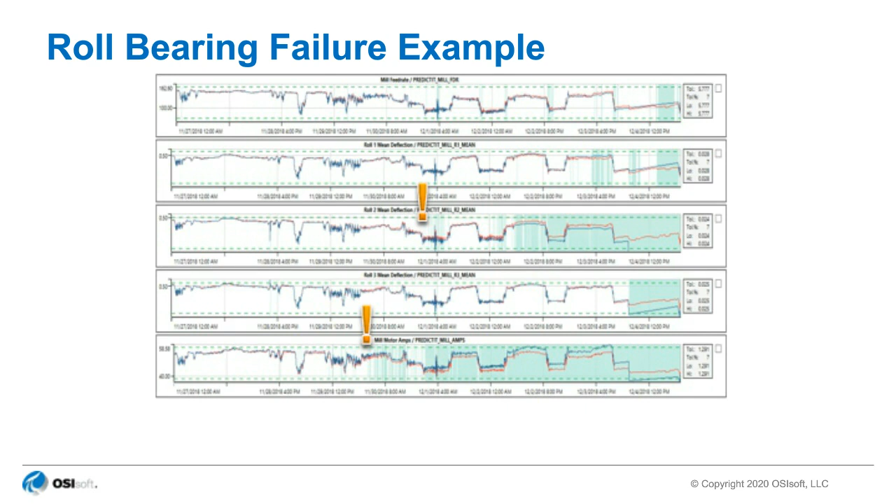So in this example here, the test exam that had the most value was: is there pyrites or coal in the pyrite chute for this pulverizer? And between that and then the additional piece of information, another roll coming in, we have now new information, and we have roll seized as our likely fault.

And so basically, given this evidence here, we are determining how likely we are to have these fault conditions present. And at some point, you go over some threshold and you say, okay, I'm pretty sure that this roll seized condition exists. So this is the basis of this diagnostic reasoner.

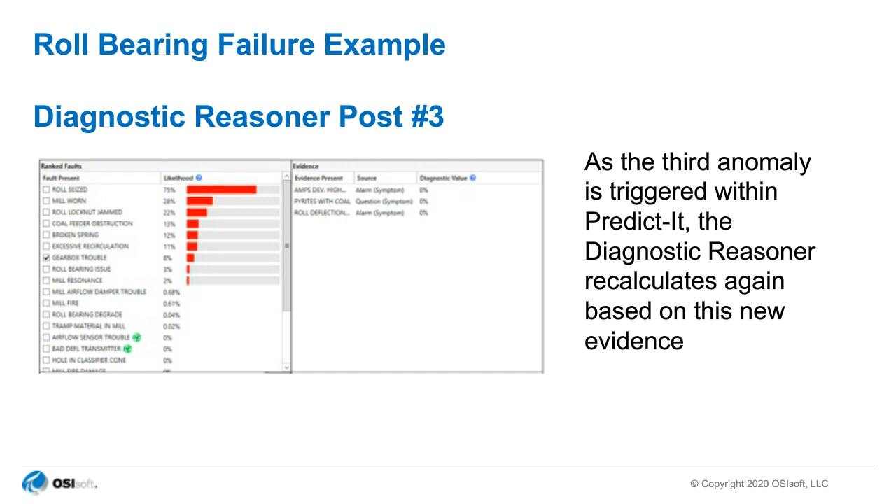And we're basically building out these causal asset networks for all common power plant equipment. We have them for the steam turbine and the gas turbine, air heaters, fans, pumps, and so forth. So we're trying to build these things out and come up with a community that can utilize these resources. So our customers here can take this and share the fault information, so no one customer has to see all these faults for the network to have the information of the collection.

So the takeaways of this presentation here are pretty much: you need a robust, stable solution to deploy these models. A single unit may have 30 to 50 different models. And this is all critical assets, the steam turbine, the generator, pulverizers, fans, feed pumps, those pieces of equipment that'll impact uptime. So you need a scalable solution.